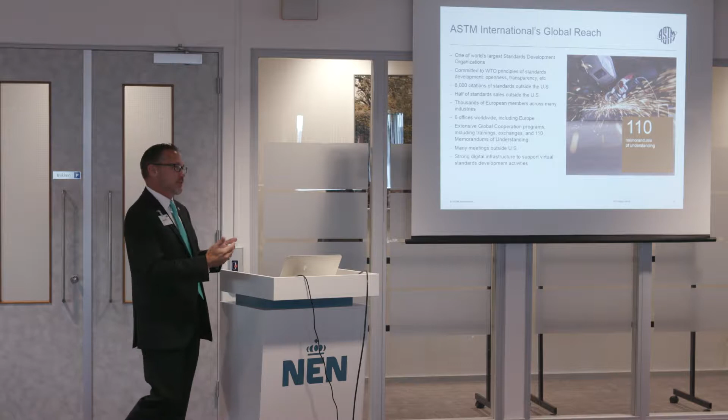We are truly an international organization. We didn't just tag it on the end of ASTM. We have quite a few volunteers in all of our technical committees from around the world. We're committed to World Trade Organization principles of standards development: transparency and openness. ASTM standards have been cited 8,000 different times outside of the US, and nearly half of the standard sales that come into ASTM are from outside the United States borders. So ASTM standards are truly used internationally.

We have 6 offices, including one in Brussels, our European office, and we have 110 memorandums of understanding with countries around the world on the use of ASTM standards. So truly a global reach, most of which is facilitated and helped greatly by our partners such as NEN.

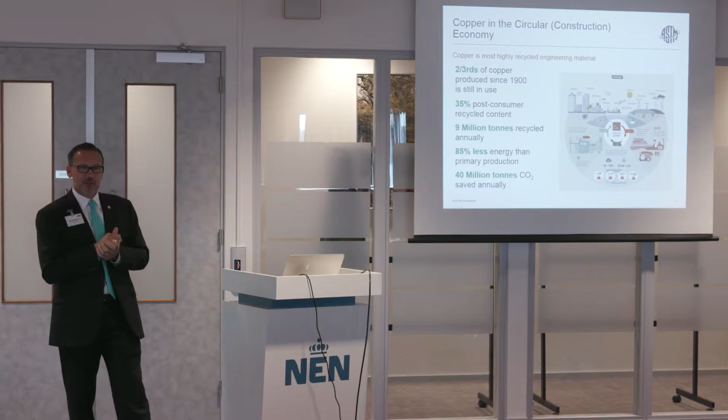So for my paid job, I managed to sneak a few slides in here. I work in copper, brass, and bronze, the copper alloys — one of the first real engineering materials used by man, and actually the most highly recycled engineering material.

By that I mean aluminum is probably the most highly recycled material overall, but you're looking at aluminum in beverage cans and things like that — you're not using it in an engineering purpose. We estimate about two-thirds of all the copper that's been produced in the world, mined and made into a product since 1900, is still in use today. Probably not as the same product, but it's been brought back in a circular manner and recycled.

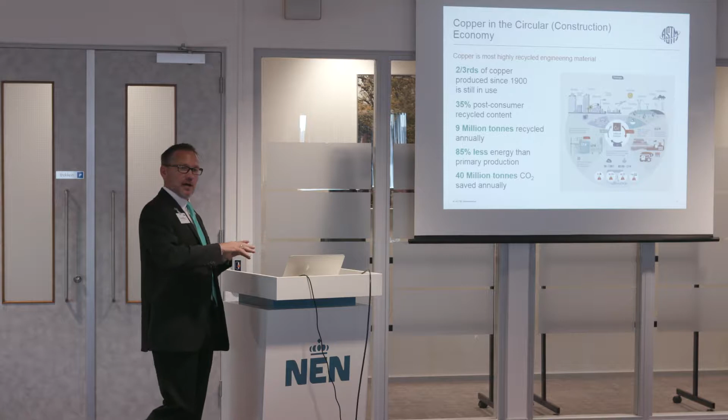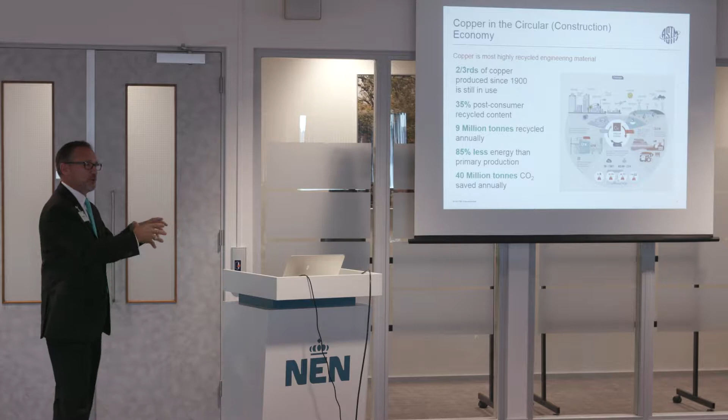About 35% of all the copper in any copper product produced today is post-consumer recycled content, with 9 million tons of copper recycled annually globally. The benefit is that copper is one of the few engineering materials we can recycle exactly back to its existing form — we don't have to downcycle it, we can take it right back to the existing alloy. That saves 85% of the initial energy put into the product.

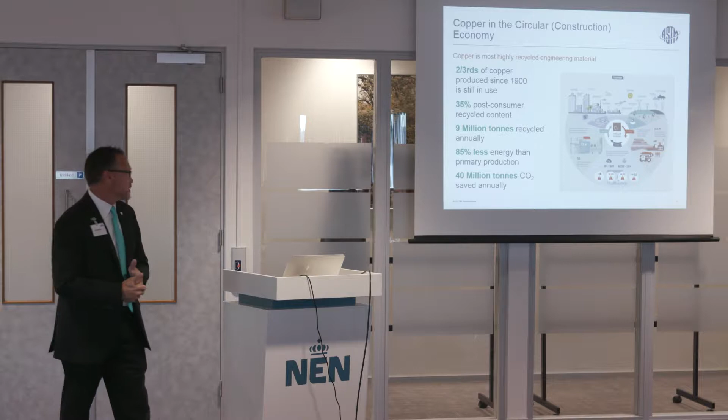So copper's really been living in a circular economy manner since its inception. This allows us to give a savings of about 40 million tons of carbon dioxide annually — that's like taking 16 million internal combustion engine vehicles off the road every year.

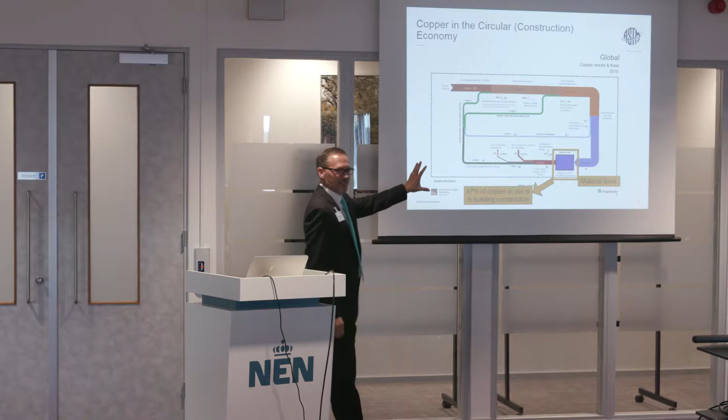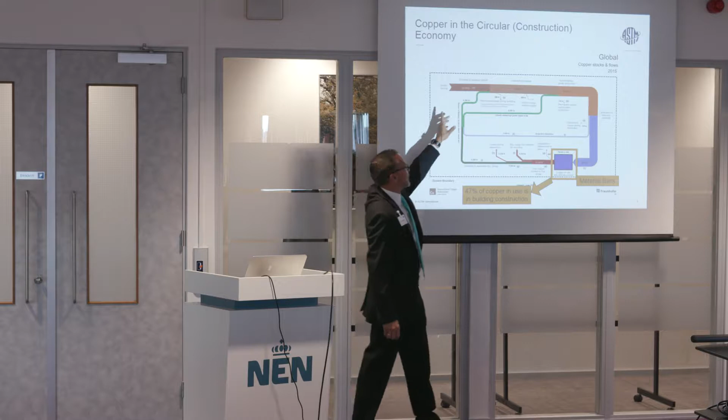Why is this important in construction? This is an eye chart, so I don't expect you to read it, but this is a stocks and flows diagram of copper globally. New copper coming in up here — the width of the arrows is representative of the volume. It works its way from production down through, and then it hits this big box, which isn't to scale, that's copper in use: the wiring in this building, the plumbing in this building.

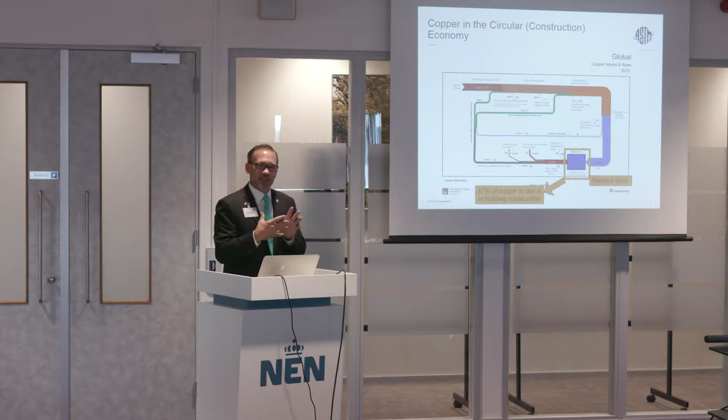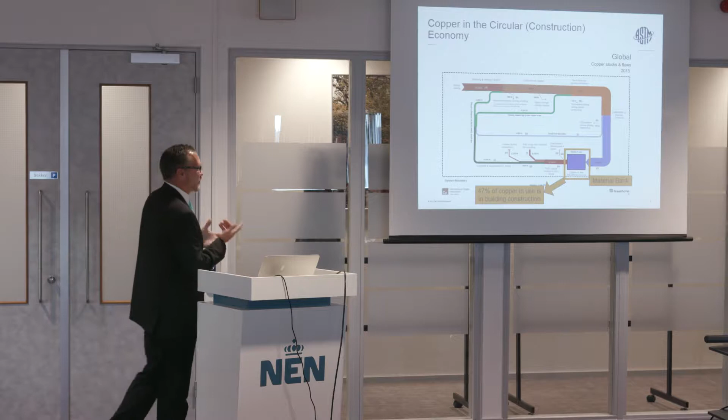That's the copper sheet on the architectural exterior of the Nemo Museum in Amsterdam. That's in use, and it's going to be in use for quite a while. It builds up as a material bank, and so it tends to be forgotten. We think of recycling for things like single-use plastic, where we see it building up in the oceans. This is sitting out there as a future material bank we can use, but we have to think about it now. 47% of all the copper, brass, and bronze products out there are in a building, so we really need to start thinking about how we deal with this at end of life and bring it back.

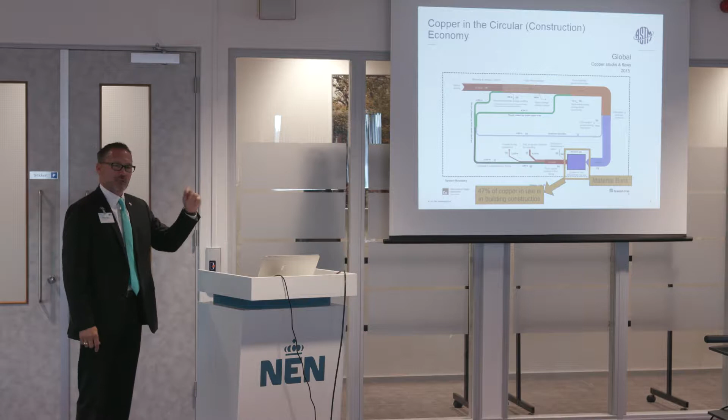That's why this is particularly important to us. Just to give you an example, most copper products we expect to last the life of the building, for 50 to 75 years. They're not often replaced. We don't think about it.

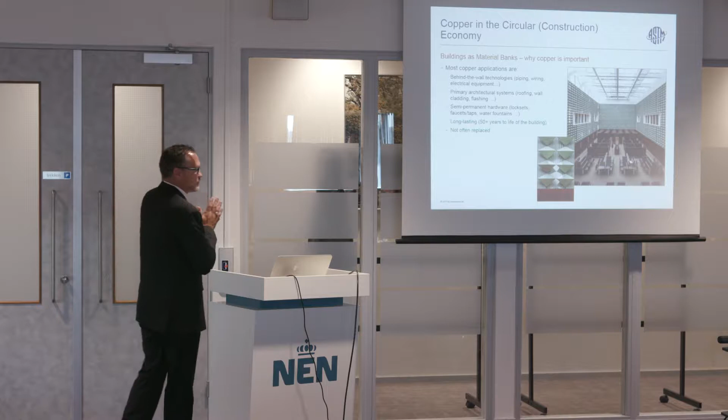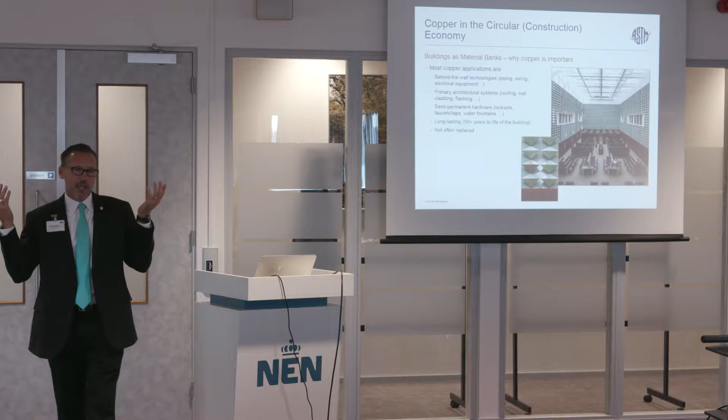This is an excellent example: the Parliamentary Library in Ottawa, Canada. They were having issues with the roof. This copper was on this roof for over 100 years. The underlying roof structure had problems, so they had to fix the structure and removed all the copper off the roof. They didn't want to scrap it or send it back to the recycle stream. So what they did is they took that copper and used it as decorative elemental ornaments architecturally throughout the building. That's the Parliamentary Library.

So it's truly a reuse, not a recycle. We don't see that all that often, but it's something we need to think about if we truly want to reach a circular construction economy.

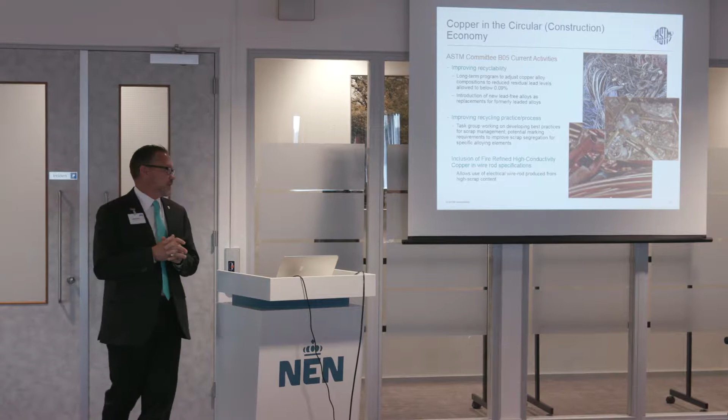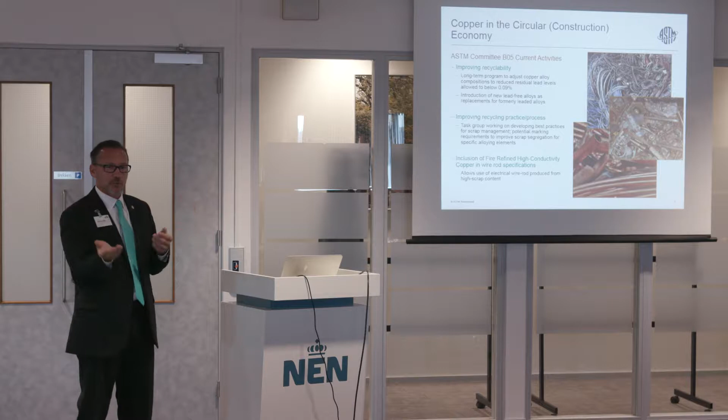As far as what the copper committees are doing, we're thinking about it all the time. Now we're working to improve the long-term recyclability of copper. Most copper used out there is not pure copper. In North America, in our scheme, there are over 800 copper alloys. We take copper and add tin, zinc, bismuth, or whatever it might be. When we do that, it hinders the recycling downstream, so we have to start thinking about how to deal with that.

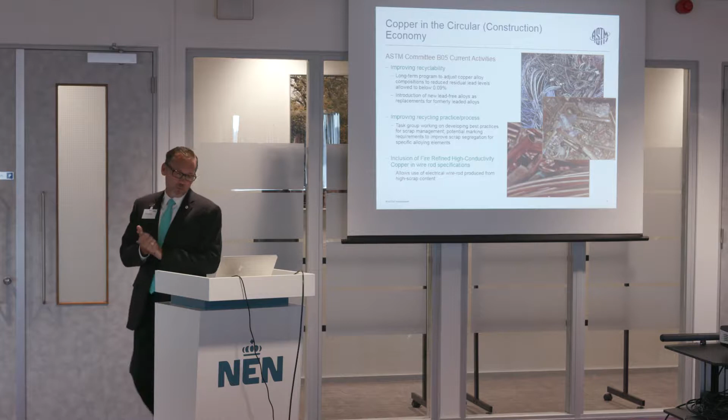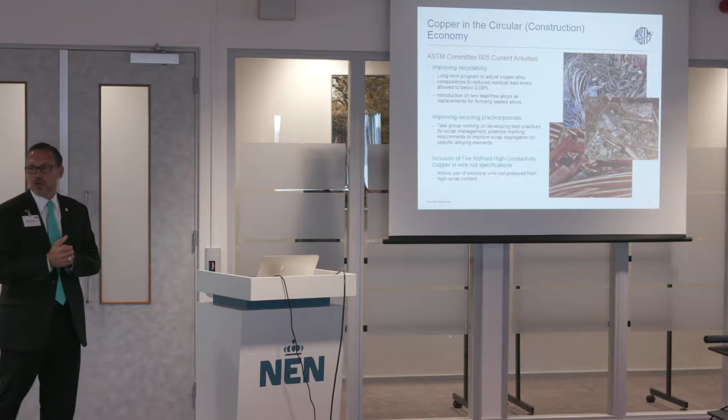So we're doing that within the committee, actually looking at technology to improve recycling practices. Most electrical copper out there, copper wiring, is 100% pure copper that just came out of a mine, cathode copper. We're working on a new technology, fire-refined high-conductivity copper, that can take scrap and turn it into electrically pure copper immediately, so we can regain all that, because 55% of copper use goes into electrical products. It's an example of really how we need to think about this circular construction economy, and that we need to think long term.

One of my dreams would be if we put the wiring and piping on the outside of the wall, it'd be much easier to do, but architects aren't going to do that, right? So that's all I have.

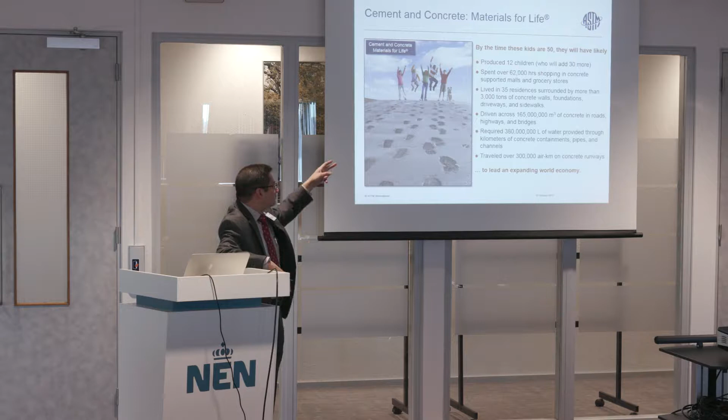But that means 62,000 hours shopping, and they're gonna be shopping in concrete malls. They're gonna be living in different residences too. They'll move around and have 35 residences that rely on probably 3,000 tons of concrete walls, foundations, and sidewalks, etc. And they would have driven across 165 million cubic meters of concrete roads and highways.

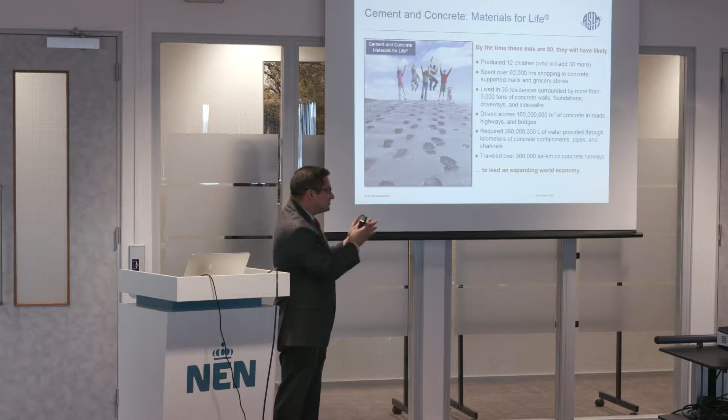And then look at the number there in terms of water. I knew we were going to have some concrete pipe experts on the panel, so this is about how much water is going to have to go through concrete pipes and concrete containments. So concrete matters. The numbers are huge. Therefore, smart use of this material is essential, and it is very important.

Again, we connect concrete to the expanding world economy. The way that happens is we rely on concrete in our built environment because, plain and simple, it makes our living easy. It takes us places. So concrete is an active player in society. It connects society, it gives us safety, and that's the first place we go when we call home - we rely on concrete. And certainly, as part of the economy, it provides local jobs in the various locations where we live and work.

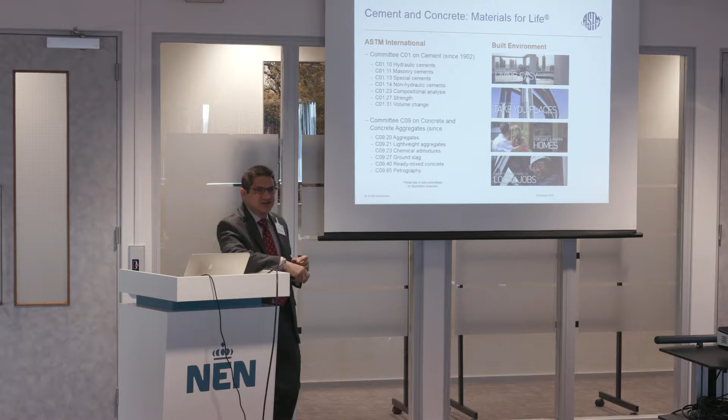But this is the built environment, and this all permeates and goes into ASTM International, where we do standards and provide additional services surrounding what the standards participate in. I am a member of Committee C1 on cement, and this committee has been active since 1902. This is not a complete list of subcommittees, but you can see hydraulic cements, masonry cements, etc. This is the list of subcommittees in areas of specific technical expertise where different standards are developed.

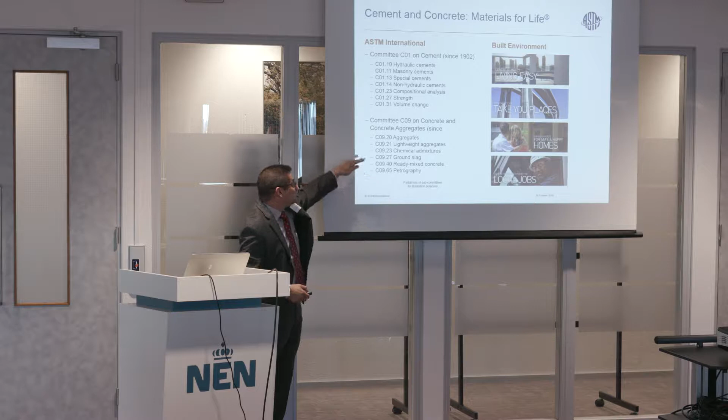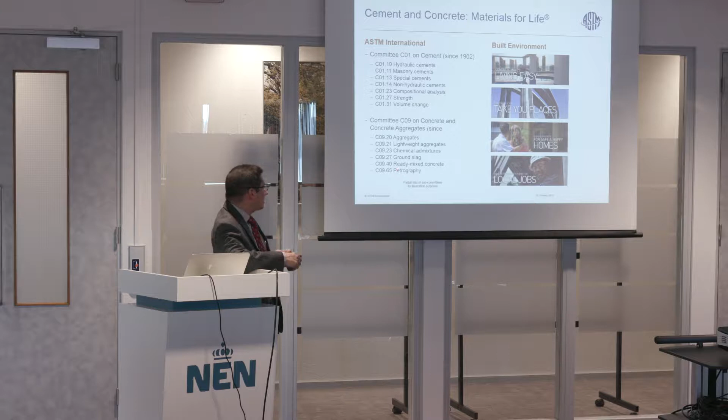Very importantly, the standards become updated periodically. So a lot of the activity is not just developing new standards, but keeping existing ones updated. In the concrete and concrete aggregates area, this is 1914 - I'm missing a number here, because I stayed too late last night on the rooftop of the W, so I'm sorry, but 1914 goes there. And then, again, a partial list of the various subcommittees in the concrete and concrete aggregates committee - you will see aggregates, chemical admixtures, ground slag, petrography, and so forth.

So ASTM plays a role in what the product category rules entail regarding the life cycle analysis of various products, and then the environmental product declarations that go along with it. This matters because once you have the products, all of a sudden you have to be able to measure things, and then you need to make a determination of what makes more sense, what's more suitable for a certain location. These are areas where ASTM is active.

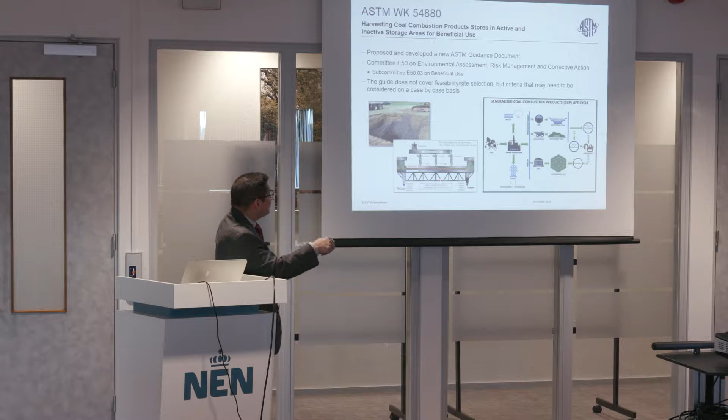But the idea is now this could be the future of where we're going to find fly ash that doesn't exist. And I know in the European Union, of course, there are many areas that are losing the ability to have fly ash.

The Australian fly ash does not meet the same spec as the European, nor the same as ASTM International. No. So there has to be some work.

So in closing, because I know the time is precious, we are connecting dots, as I said earlier. ASTM International is all about connecting the dots from research and development to a market and to utilization. And of course, in the construction industry, cement and concrete are after lowering environmental footprint. ASTM standards are tools that enable us to do that. So that plays directly into the sustainability and resilience of the built environment, but it's key to collaborate, to harmonize standards so that they can actually, with a passport, travel.

So we want to help the world work better. Thank you very much.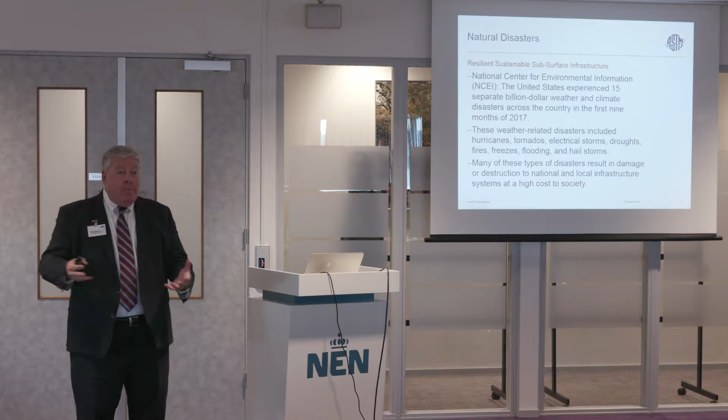We have a lot going on this year in the United States, and many of these will result in damage or destruction to our infrastructure systems. The last thing you need is to have infrastructure gone either right before or right after a natural disaster. These disasters happen everywhere, not just in certain areas of the country. We have hurricanes across the Gulf South where we live in New Orleans, but also forest fires in California, in Colorado, droughts, and river flooding in the Midwest.

So we have to define what resilient systems are that we need to design to. Resilient systems are those that can absorb a disturbance but still retain their basic function. For evacuation routes, you know you're going to have problems, but you want piping systems, the concrete pipe, that will stay there after the storm. Because it's very important to be able to get people out before a storm, but then have the emergency responders come back in immediately after a storm to start assessing the damage and look for people who did not evacuate.

And that's critical right now. You're seeing it going on after Hurricane Michael in Florida. They're still trying to get back into some areas because we had built roadway systems, evacuation systems, that were not resilient, not dependable, where the roadways all got washed away. So we need to upgrade that.

Sustainability is frequently defined by its association with recycling and reuse of materials. So we're starting to bring that into our construction and manufacturing processes. Sustainability of infrastructure relates to the efficiency with which those resources are used.

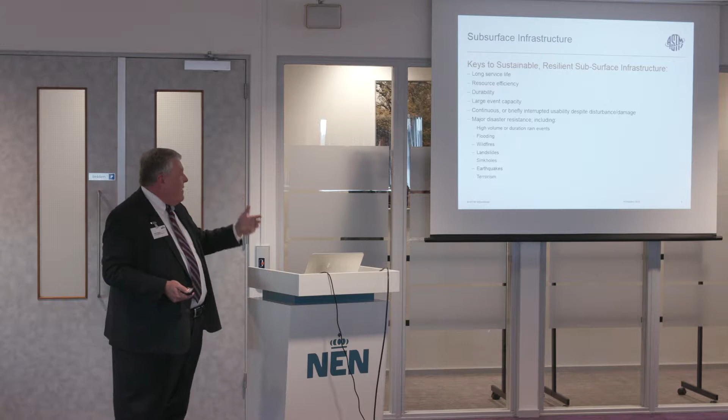So we're trying to elevate our standards so that you have these resilient systems, and we know that nothing is completely disaster-proof, that there are going to be some problems, but you need to be able to be resilient to those problems. So major disaster resistance has to include high volume duration rainfalls, flooding, wildfires, landslides, sinkholes, earthquakes, tornadoes, and terrorism now.

You can't have this coming in. That was another piping system that after an event, the pipe collapsed. And these are the emergency responders getting back in. It's going to take them a day just to get the truck out, much less be able to repair that system and get something else back in. That just can't happen anymore.

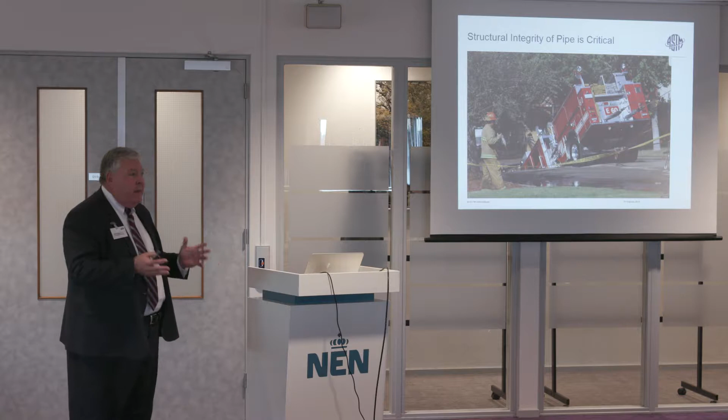City of New Orleans, our drainage system after Katrina. 80% of the city was flooded. I don't know if you know all the events. Part of it was flooded because of the seawater that came in, but part of it was because of an engineering design.

We collect all of our rainwater, and all the rainwater goes into the local systems and then into canals, east-west canals feeding north-south canals to take it to pumping stations to pump into the lake. On those canals going out to the lake, in building the sheet pile walls for the drainage canals, they misread the sand layer. So when they were putting in the sheet pile walls, they went to 17 feet, which was a very 6-inch layer of sand rather than 36 feet. The bottom of the canals were 18 feet deep, and the storm surge that came in was an additional 12 feet, so you had 30 foot of head on a sheet pile wall.

In 3 different cases, the exact same problem, because they tried to skimp on things. They tried to go in cheap. And because of that, 80% of the city flooded.

Now, major street damage and subsidence, because the water stayed there for 3 weeks. So you have the streets coming up and down and all. Luckily, we got some money from the Federal Emergency Management Agency. It's a national agency that will come in and help cities redevelop. But our drainage system was 100% concrete pipe.

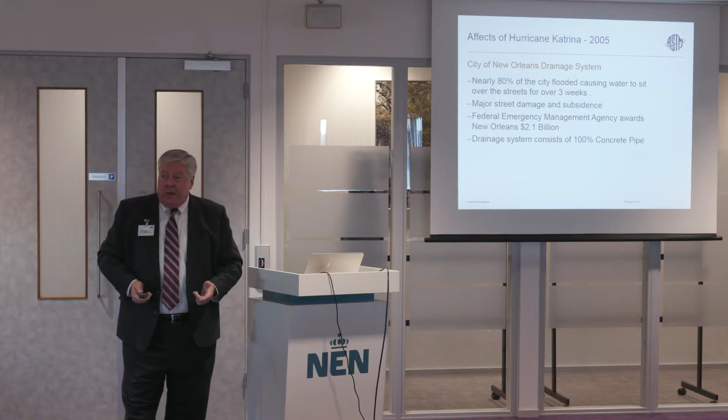My grandfather started our company in 1932. We have had no structural failures since 1932 of any of the pipe. Now we have had, because of Katrina and the streets, some of those pipe joints need to be repaired, but no collapses of the pipe. So we've been able to, it's been 13 years now, and we've been able to continue to live on that system while we're bringing back the streets one at a time.

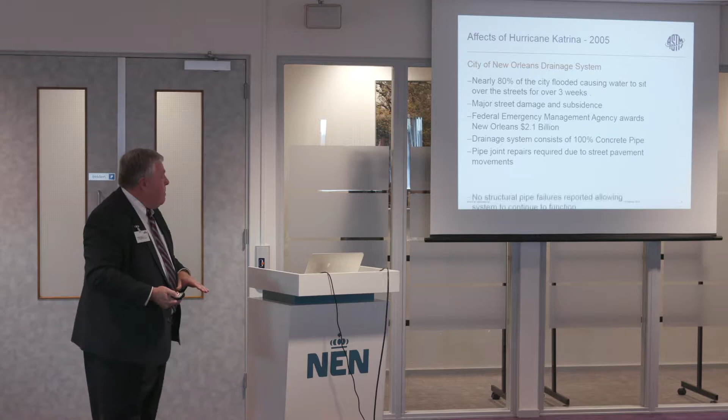So we didn't have to completely shut down the city, put a whole new drainage system in, a whole new sewage system. We can do it now at our pace when we have the money to do it. So there were no structural pipe failures, allowing that system to continue.

So the significance of concrete pipe properties. We need to have, in this resilient infrastructure, the compressive strength. You have to have the density, the absorption, water cement ratios. All of these are important.

After the New Orleans event, we started talking to our Congress and said, this is so critical. In New Orleans, we had to evacuate 2 days before the storm over 1 million people that had to leave the city. We needed to get those emergency response people back in, and we couldn't have done that unless we had a very good infrastructure system.

But there are other places in the country that have grown very rapidly that don't have that type of infrastructure. We're finding that in California, we're finding that in Colorado, where the forest fires will come in and pipe will melt or burn, and roadways have collapsed, and you're cutting off people. Either they can't get out or they can't get back in.

So what we've talked to Congress about, and the president just signed a bill about 2 weeks ago, it's the Disaster Recovery Reform Act, where they've finally gotten to a point where they said, yes, we will pay more up front to bring in more resilient, more durable, more sustainable systems, even if they cost more. We'd rather have that going in at the front, so when a disaster comes back in, we won't have to repay every time for the same system to go back in. That's what they were doing before. If you had a cheap system, that's all they would put back in as a cheap system.

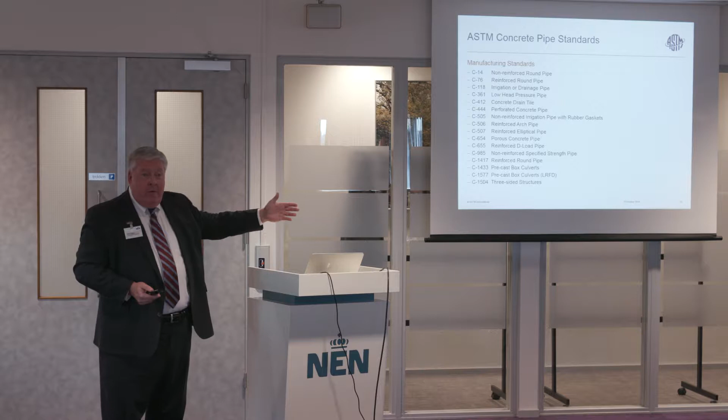So now they're looking at foresight and saying we have to increase these systems up front. Our committee C13 on concrete pipe - this is just some of the standards we have. We control over 180 standards of concrete pipe and precast concrete products. All of our standards include material standards.

In those material standards, we're using industrial byproducts including slag cement, natural pozzolans, coal fly ash, and silica fume. That helps with the workability of the product, the cohesiveness, the finish, the durability, to give us that 150-year lifespan.

And as I said before, most of that pipe, when you put it in the ground, you're going to change the pavement on top of it. You don't want to change the pipe for a long period of time. No one has the maintenance money to do that.

So in all of the design standards we have for concrete pipe, we include Portland blast furnace slag cement, slag, and fly ash, so that we're reusing these products to make ours better, but also to keep the energy costs down of making the products.

We're also looking at research into the future. We're looking at, and have just completed, standards on the use of synthetic fiber reinforced concrete to take the steel out of the pipe and use fibers instead.

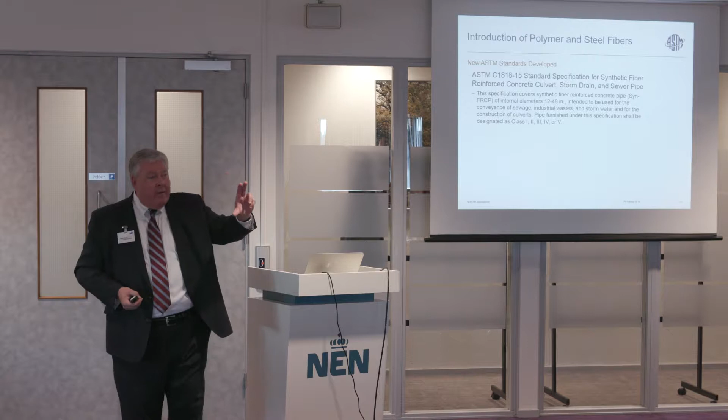In doing so, we're able to cut down the wall thicknesses. So we're using less concrete, more fibers. It's becoming almost like a flexible pipe, but it's actually saving us a ton of energy.

And we're also looking at the same thing with steel fiber reinforced pipe, where you're taking out your steel cages and adding smaller steel fibers for your tensile strength.

In doing so, we also need members. Our committees are set up differently than NEN in that as a producer of the product, we can only have 49% membership on a committee. The other 51% has to be from the end users - state highway departments, city engineers, consulting engineers. So we're constantly looking to get them involved because these are voluntary standards, and we want them to be consensus standards so they're accepted across the world.

So we're constantly looking for new members. If any of y'all would like to join our committees, we'd love for you to. Our committee on concrete pipe just finished our meetings in September - we met in Cleveland, Ohio, and next September we're going to Victoria, British Columbia.

However, the committee meetings for ASTM are ongoing. This month we have committee meetings coming up in Washington, D.C., in October, November, and December, and each committee week has approximately 30 different committees that get together at the same time to save money and travel and to continue developing these standards. So again, we'd love for anybody to join ASTM - it's $75 a year, so it's a bargain.

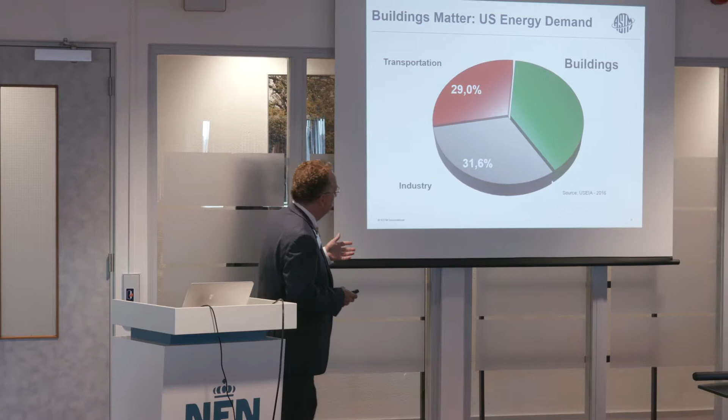So, why does this matter? I'm going to share with you some of my perspective as a building scientist on why buildings matter. I'm going to share a little U.S. dirty laundry as well. So first of all, this is U.S. energy consumption. Now if you ask most people in the United States where does our energy go, they're going to say, oh, it's transportation, it's energy, it's industry. No, most of our energy goes to buildings, about 40%.

And it's roughly... the automation, the translation is messing up the numbers. Forget about the numbers, they aren't important. The important thing is that this building energy use is roughly equally split between commercial and residential buildings.

We, as building industry professionals, are terrible at conveying the importance of what we do every day. And it's because of this, it's because of the stuff we plug in. We have an insatiable appetite for electricity. It shows no sign of abating. If I travel around the world, everybody everywhere wants that stuff. So where do we get the food to satisfy that appetite?

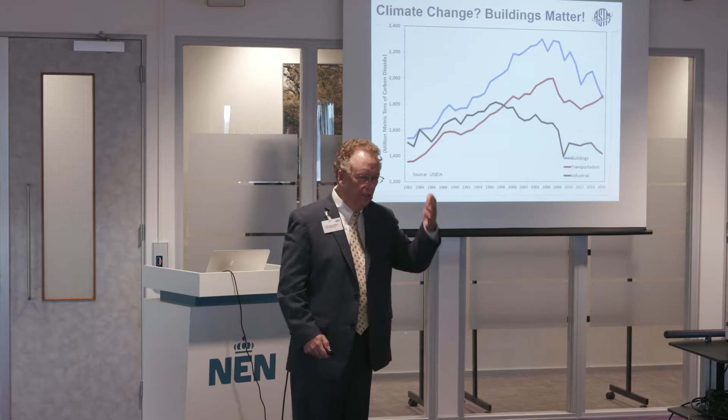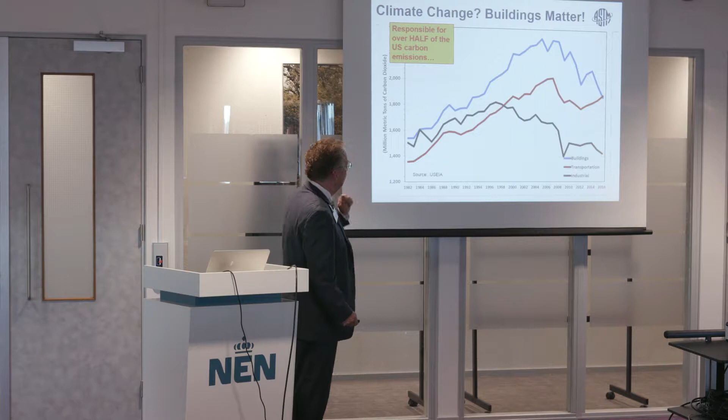If you're a green building nerd like me, you might think of buildings in terms of their carbon footprint. And in the US, we find suddenly that buildings are our biggest polluter. Or said another way, the typical US house pollutes twice as much as the typical car. Now, we don't think about that because the typical car has exhaust pipes. But the exhaust pipes for the building are out of sight, out of mind, down at the local power plant. We have failed to convey the importance of our buildings, whether you believe in climate change or not.

Both of my predecessors spoke about water, and we did not plan these presentations, but over half of the extracted surface water in the United States goes to make electricity. That's about 3 times the amount of water going over Niagara Falls every minute. We don't think about that—water, buildings, energy. Coal and nuclear plants require cooling towers, and we put all of these power plants on rivers and lakes that have access to water. In my home state of North Carolina, 85% of our extracted surface water is used for coal and nuclear cooling.

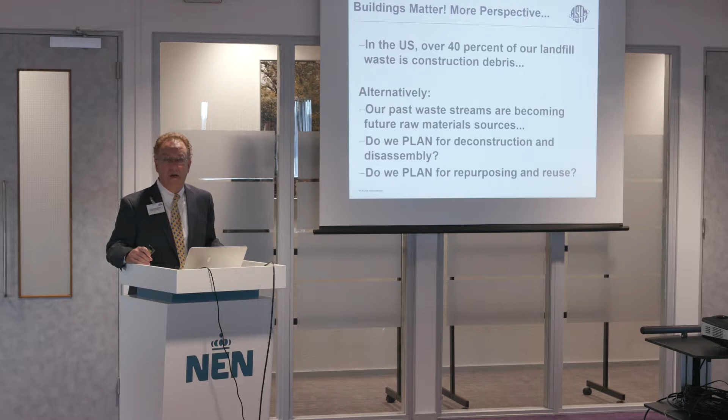Again, we didn't coordinate these presentations, but in the United States, over 40% of what goes into our landfills is construction debris. If I share this slide with a third world country, they would look at our landfills as a supply chain. And that's what we're learning right now—I predict in a few years that the people who own the landfills are going to be some of the biggest industries in America, because what do they have? They have the stuff that we used to throw away wastefully—the metals, the plastics, the coal combustion byproducts—all of that stuff, which today we now think of as raw materials in a supply chain.

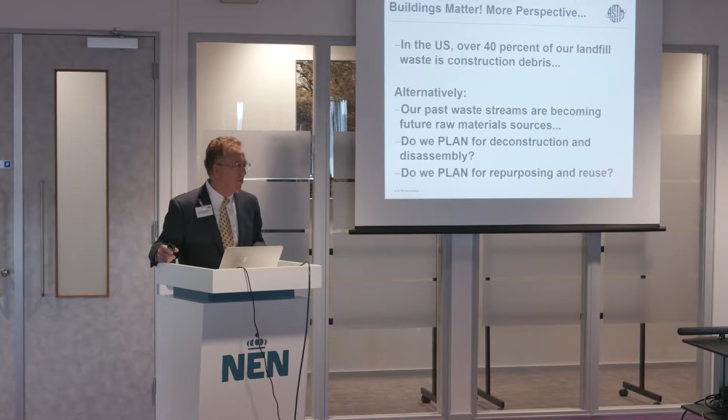Some other examples: asphalt roofing. What do we do when we rip off a roof? It used to go in the landfill. Now we're looking at construction composites and blocks and civil engineering usage, and ways to have acoustical attenuation with asphaltic products. Glass bottles used to just be thrown into the landfill, but now they're the primary feedstock for fiberglass insulation and the next glass bottle. So materials repurposing is something that not just these handful of industries are looking at, but all across the compendium of ASTM committees that are thinking about buildings and building performance.

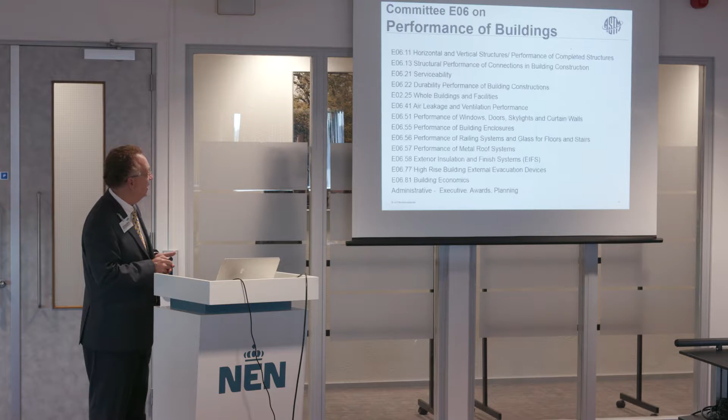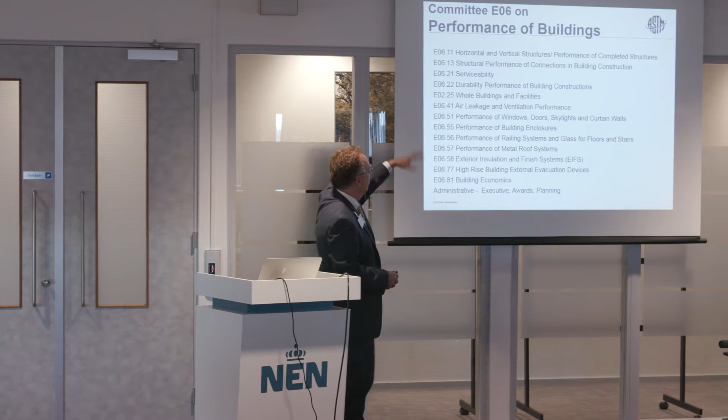I'm going to share with you just a little perspective on Committee E6, one of the committees that I'm very closely involved in. Don't pay attention to all these words, we'll give you a copy of these presentations. There's a lot of subcommittees. They do a lot of things: durability, air leakage, energy, safety, metal roofs. But what I want you to pay particular attention to is how many of these subcommittees have the word performance in their title.

We've learned that it's not okay to just build a building. We then put people in it. And people have to breathe, have to be safe, have to be fire safe, have to be able to evacuate in case of an emergency, and have to be comfortable. I could build a building here in the Netherlands with single glazing, and it might last for a long time, but no one is going to want to sit next to that window in the winter because it will be cold, no matter how much horsepower or heat we throw at it.

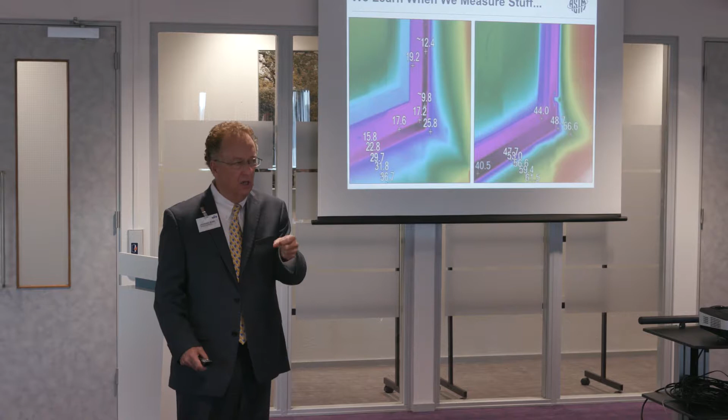So measuring things has gotten quite sophisticated. We can measure window performance, measure wall performance, measure structural performance, measure compressive strength, do accelerated weathering, accelerated aging. We as a young country in the United States are learning a painful lesson that we need to measure more to demand more.

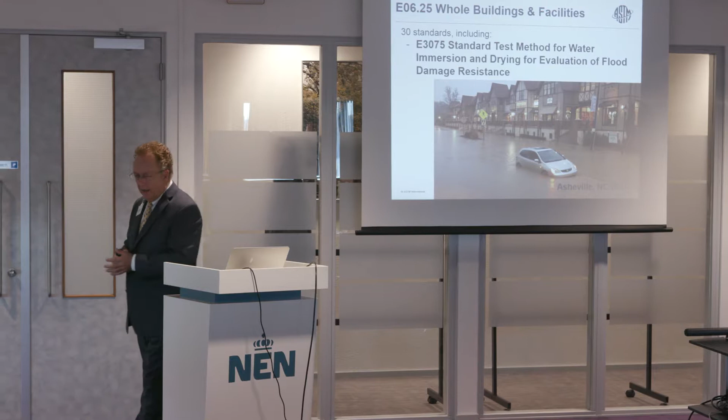This one is close to home for me because I live in Asheville, North Carolina, and we've just had, in 3 weeks, 2 hurricanes. And while this picture is not nearly as sobering as what we saw with Katrina, if I were to go out to the coast of North Carolina and tell you that we had areas of our coast that received 1 meter of water in a day, in a place that had never experienced that before.

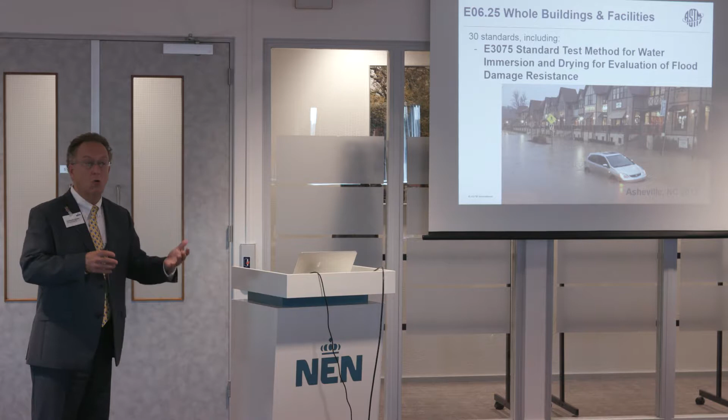So did the infrastructure hold up? What do we do to recover afterwards? How long will it be until that infrastructure can serve the people who are going back home and need to rebuild? Close to home here for you in the Netherlands, and for all of us as world citizens, was the recent earthquake and tsunami in Indonesia. And then, just last year down in Texas, near where Cesar went to school, Hurricane Harvey.

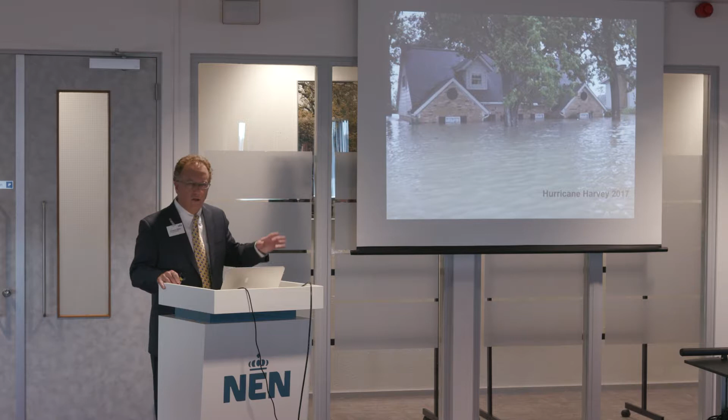We're not used to this. And while all the climate scientists say that the extremes are going to be more extreme, no matter how many deniers we have, the data—those of us who are driven by data—see exactly the data trends that have been anticipated.

The good news is we have the ability to change. Now I will say, change makes everybody uncomfortable. I can explain to builders why they maybe should change a wall construction system that we learned 200 years ago to a better construction system, and I can show them how they could use less material, it'd be stronger, better insulated, more durable, less waste. But I ask them to do the one thing that makes us all uncomfortable: I ask them to change.

The good news is we have tools today that will enable making change less painful. We used to wonder about the air leakage of a building. Put on your mechanical engineering hat for a second and let's size the equipment for this building. We know the wall performance, we know the window performance, we know how many people are in here, we know the lights, the copiers, the computers, and the elevators, but what's the one thing we don't know? We don't know the building's air leakage. We now have the ability to test the air leakage.

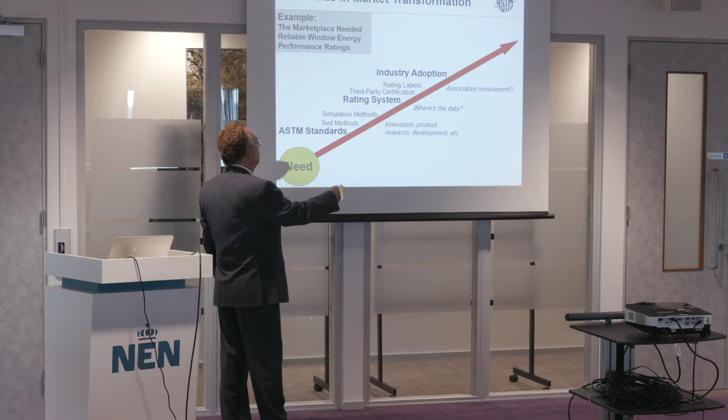But that's not market transformation. That's just the opportunity for market transformation. You have to then get the industry to engage in it. And that's why the window industry and the glass industry and the building code industry all worked in this regulatory arena to get broad adoption and then get it into the building code, get it accepted into the marketplace, and to transform the market. Now, this is not a fast process.

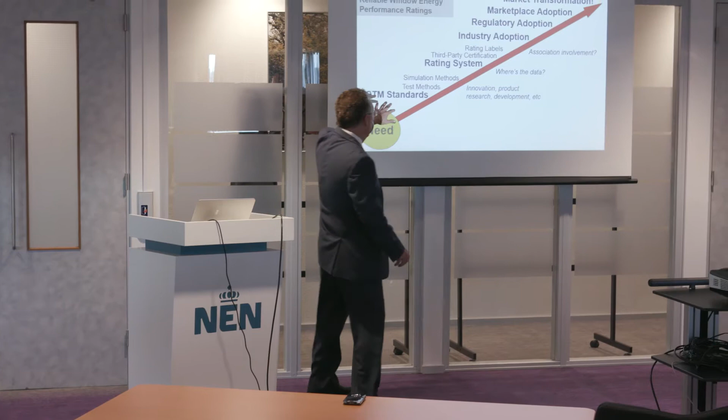Why? It's not that we could just write a law. We had to first have the industry involvement and participation. That's what happens in all of these ASTM committees, just like here. The industry rolls up their shirt sleeves and works to solving a problem. We had not only the window manufacturers here, but we had the laboratories here. We had the government regulators here saying, here's what our building official needs.

Put yourself in the shoes of a building official for a second. You walk up to a window. What's the energy performance of that window? Does it meet the code? And now we have that market transformation.

The trouble here is that market transformation takes time. The building industry, even though it's very innovative, as my predecessors have talked about this morning, even though it's very innovative, it's very slow to change. Because why? Because change makes us all uncomfortable. Even change in our own best interest.

How many building materials do we deliver to the typical job site today? 50? 500? 5,000? Most of which are not necessarily designed to go well together. And we expect them to withstand the forces of sun and wind and rain and climate change and 3-year-olds.

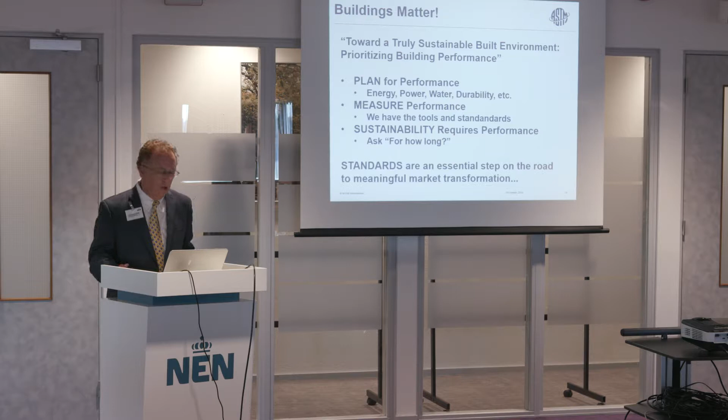Like Oliver, we extend the invitation. I think that if you were to ask any ASTM member about any topic of interest, they would say, you should join our committee week. Please come and participate with us. If you've got specific skill, knowledge, and expertise on a given topic, we've got a place for you to participate and help make buildings better.

E6 meets about every 6 months. We're going to be meeting next week. We're coming up on 300 different standards on the performance of buildings, and I'd say we haven't touched all the topics yet. Interestingly, Committee E6 is the founding home of what is now our separate committee specifically on the topic of sustainability. So I invite you to join us.

I appreciate the opportunity to be here and share with you, and thank you so much for hosting us. The future is in our hands, so thank you very much.

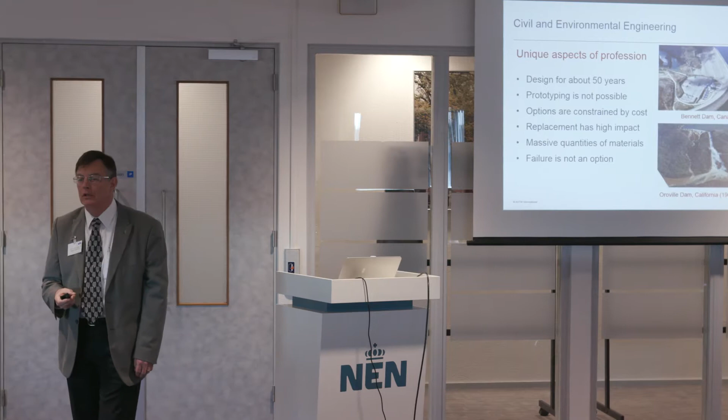Next is the size of the problem we deal with: massive amounts of materials. In my world, this is an earthfill dam - that's an enormous amount of material. Are we going to be green with that? Are we going to recycle all that material? I don't think so, it's not going to happen. You take the concrete from a structure, if you're going to break that structure apart to reclaim the concrete, there aren't a lot of places you can put crushed concrete. We generally create more materials in doing those things than we can consume in second-use type applications.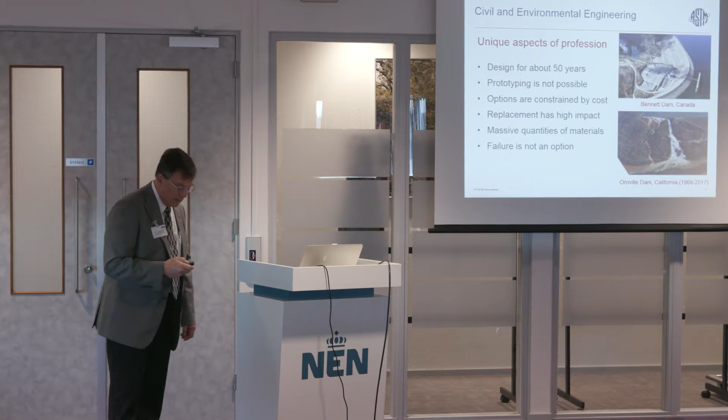And then finally, we are not in a position to accept failures. So my dam cannot, or my building can't, fall down and have that be an acceptable situation.

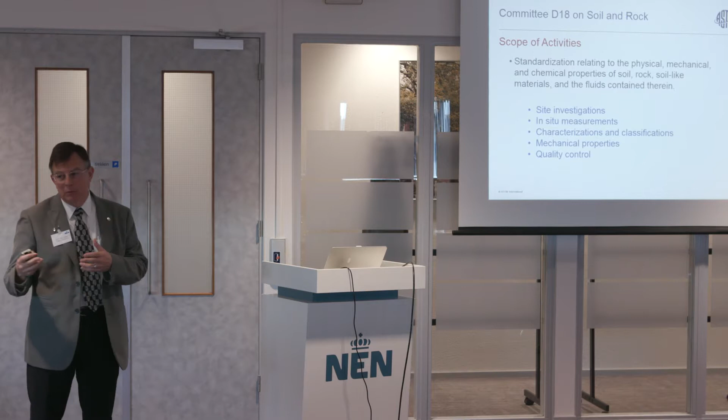I'd like to now change gears a little bit and talk about what my committee does. My free job here is I'm the chairman of the ASTM Committee on Soil and Rock, which is D18. We're the people who write the standards associated with how you characterize materials, either from the characterization of physical properties or mechanical properties - strength, compressibility, permeability. We do things about site investigations, in situ measurements, lateral deformations around buildings, quality control type things in both laboratory testing and field applications. So that's where most of my time gets spent in the volunteer world.

The committee itself is relatively large. We have 1,200 members and we are responsible for 365 standards. And nobody mentioned this yet, but in the ASTM world, every one of those standards has to be reapproved within 5 years. So this is a tremendous workflow that we're responsible for. I sit over 22 technical committees and 11 administrative subcommittees.

Our member composition looks like this: we have 14% of our membership from international members. We have representation from 52 countries, and actually 2 members from the Netherlands participate. And then we have some academics, government, and nonprofit people.

A little bit of a historical perspective, and I think there's a very nice back message to this. This committee was started in 1936, and our initial objective was essentially road construction. At that point in the United States, there was a massive amount of infrastructure being put into the road industry, and that's why this committee was started.

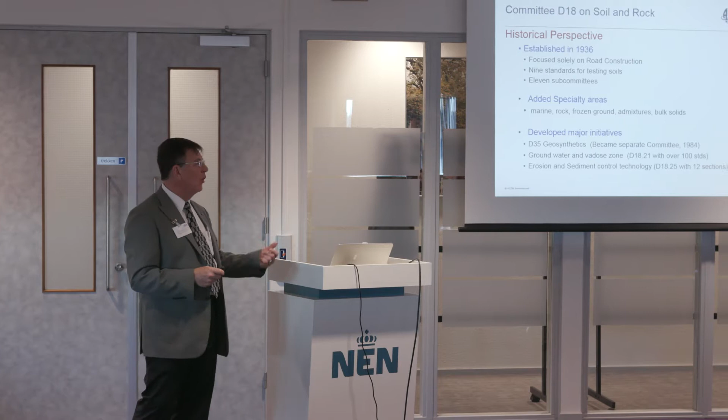And then a cute little group here who does bulk solids, and these guys deal with cornflakes or coal ash or cement powder. It's all about conveyance of particulate materials, which is what I consider low stress soil mechanics basically.

And then we've had a variety of what I would consider major initiatives, and one is a new committee that was spawned off from our activities, which is one on geosynthetics, which deals with liners in landfills and things like that.

Another one is on groundwater and vadose zone, which is a subcommittee that was developed because the US EPA needed some standards in a particular area, so we started an activity specifically for that. That particular committee has now grown to the point where they have 100 standards, so they have almost a third of all of our standards out of a subcommittee that was brought to us as a problem area.

And I think that's one of the really strong points of ASTM. It's a relatively nimble organization that can change depending on what the particular objectives are.

And like everybody else in ASTM, I will make a joke about the Cannabis Committee because we had to do that because... we were coming here, I think, isn't that why? Anyway.

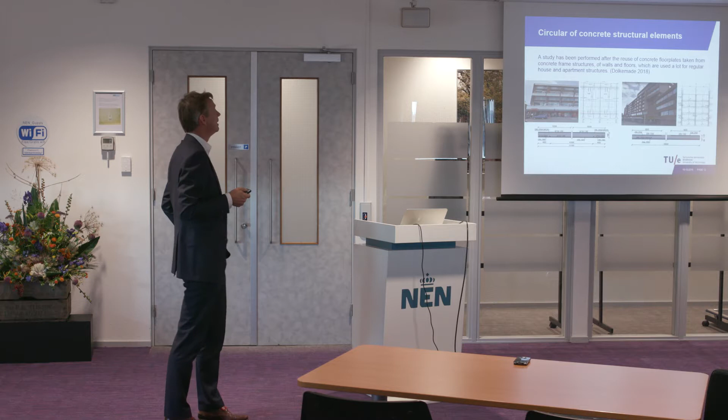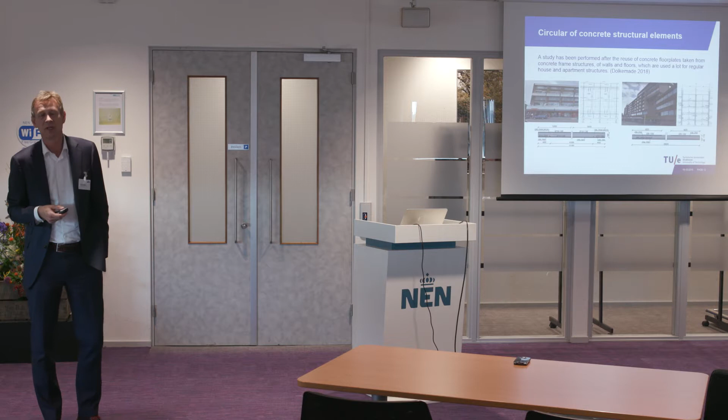So a master student of mine, Eline Dolkemade, performed a master study on this possibility from a structural engineering point of view. From an economical point of view, it will be completely different. But what we have in the Netherlands is quite a stock of buildings consisting of concrete frames with concrete walls with very little reinforcement or even non-reinforcement, and continuous concrete slabs.

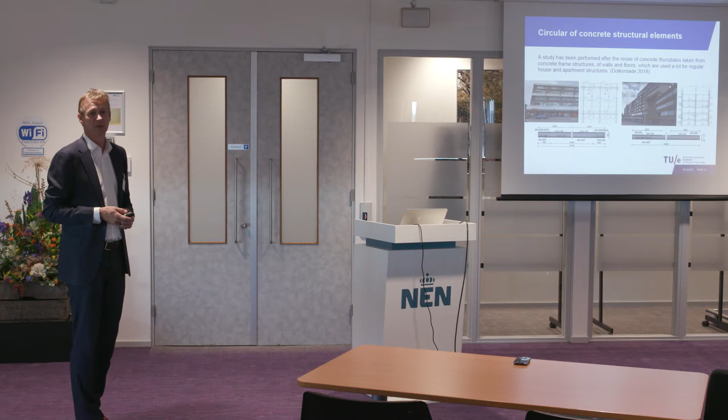And instead of completely demolishing those structures, we can take existing plates from the floors, and even from the walls, and they can be reused. For instance, they can be reused for the structure of terrace houses like these.

Within our studies, she looked at several structural details, taking the starting point that disassembly of the structure should be possible for further recycled use, while taking care of the vertical load transfer, the function of the floor, and also the diaphragm function of the floors, which is quite important.

Her study did not focus on economic aspects, only on structural aspects. However, when you think over the model, it is likely that there will be a party that will buy floor plates from a structure to be demolished. And that's the same party from whom you can buy old floor plates to use in your new structure. That is the only way it can work.

And the following statement is also valid when you want to completely reuse an existing structure: it can only work well when the actual information of those structures and structural elements is available.

If you have to determine properties again and perform new research after the fact, it will never work from an economical point of view. But when you are able to keep the relevant information connected to the structure, and in that process sketched from demolition to stock and its new use, you can keep the information connected to the element.

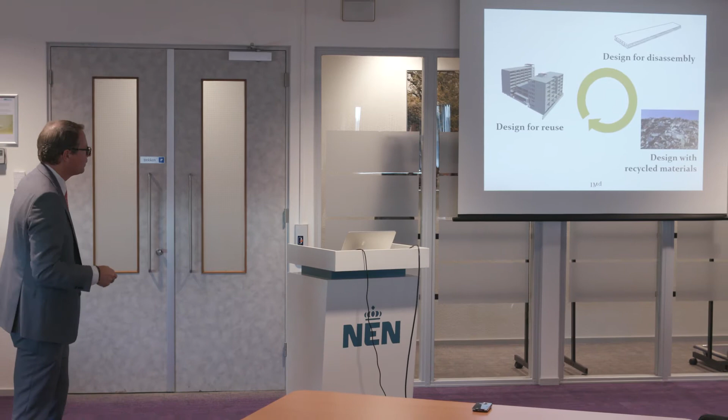I think the lowest form of circular economy is designing with recycled materials. So you already hear upcycle, downcycle. For me, recycling is very good and we have to do it, but the higher ground is in the other two approaches, and there we can gain a lot. In practice, I've learned this over the last 6-7 years, during a period when there was a bit of a crisis in Holland and a lot of office buildings were empty.

This is such an office, standing in Utrecht. It was an office building, and after 10 years the people there moved out and left the building. What can you do with it? This ugly duck you can transform into a very nice dwelling project. By researching these structures and buildings, we learned a lot. Here you see the concrete facade, and if you take it out, you get a stripped building—the skeleton of the building—which is, as said before, a very flexible structure. Because you don't have load-bearing walls or a load-bearing facade, you get a really nice building you can use.

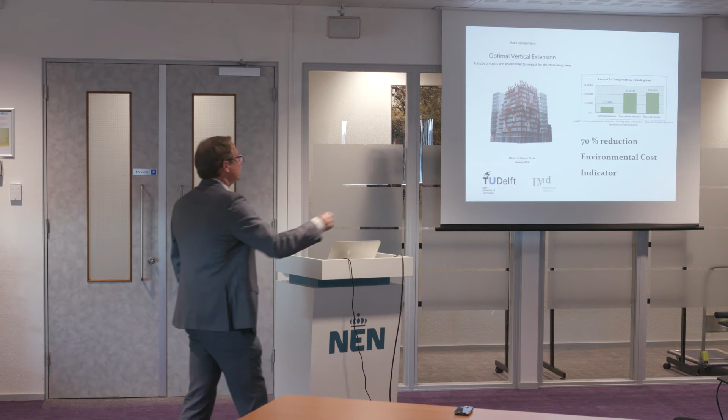The most economical option was scenario 2, where we could add 4 stories. The reason was that the cellar underneath was on good sand soil, so we could place more load on this foundation without any problems.

But the main goal was to also check what happens if we build new versus if we transform. You see that the environmental cost indicator of the vertical extension is almost a 70% reduction in environmental cost compared to building new. So it's a very big saving on the environmental cost.

Therefore I think the standard should be that we must think about the designs we make now so they can be reused - not only reused multifunctionally, but also thinking about what we can already do in the foundation so that our children or grandchildren can build up more stories. If, for example, in my village Pijnacker everybody wants to live there, then we can build up and top up all these buildings. So I think this is something we have to bring in as a standard, as a regulation.

However, I don't know which committee I have to apply to in order to bring this in. So perhaps if somebody knows, I would like to hear.

But what happens if you have a structure that cannot be reused, so that the function cannot be used anymore? In Amsterdam, if you're walking around in het Rokin, there's a big new Hudson Bay, a famous building. Before the Hudson Bay, it was a bank, an office for Fortis, and after 26 years they sold it. They were very happy that they sold it.

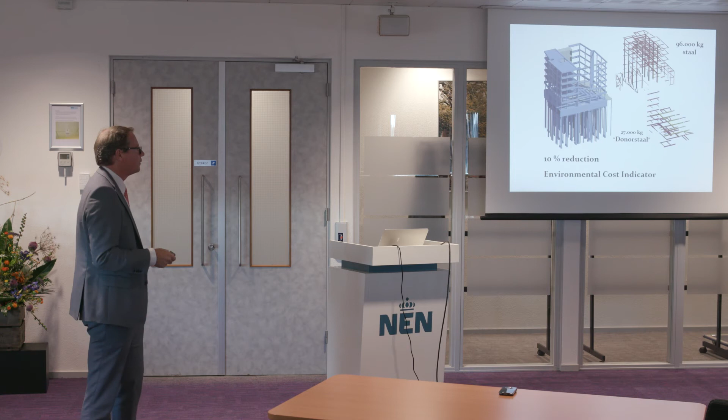But at the end, for the whole building, because the floors have a bigger impact on the environmental cost indicator, we only achieved a reduction of 10%. So even with a donor skeleton, due to the fact that it's a small part of the building, sometimes you don't have a very big impact. So you really have to take care of the impact.

Or sell this to people that are smaller than us. So bring it to Spain or somewhere else.

I'm really pleased that even the government is now challenging the construction industry, because in their grondstoffenakkoord, the resources agreement, they challenge us with construction should use demolition waste in new construction projects. So they challenge us by using the waste for new projects.

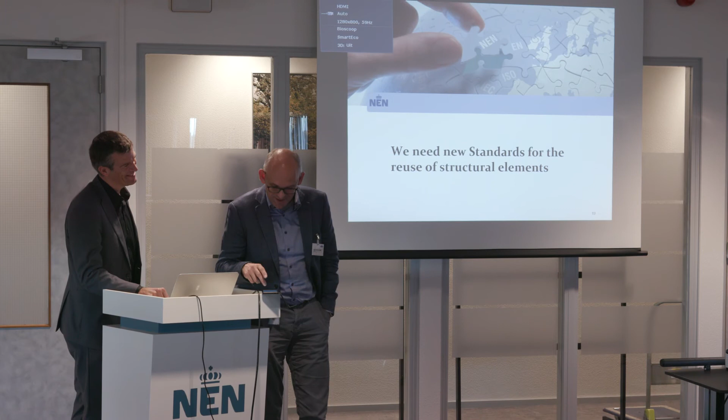Yes, so I did a little bit different. I made some notes. May I say from a perspective of observation? So, I'm Jaap van der Heide, and I'm happy that I did that, otherwise about half of my story would have been told earlier. So I've taken some notes and I'll react to some of the presentations before.

First, let me introduce the organization that I'm working for. I'm at Rijkswaterstaat, which is the operational part of the Ministry of Infrastructure and Water Management, as it's called, since about a year.

We are an organization, I just looked it up, which was founded in the year 1798, which for Americans is perhaps quite old. In Holland it's not. I live in the city of Leiden and we have het Hoogheemraadschap van Rijnland there, which is a water board. They don't exactly know when it was founded, but it was somewhere between 1248 and 1255. So that has been running for 800 years.

Rijkswaterstaat runs 3 major networks: the main road system, the main waterway system, and the main water system. The main road system for us is basically the motorways. We operate about 4,500 kilometers of road, 3,000 kilometers of that are motorways, and the rest mostly is access roads. All the other roads are operated by the provinces and by the towns. In this network we have about 2,750 viaducts, including 13 aqueducts, 22 tunnels and 743 bridges.